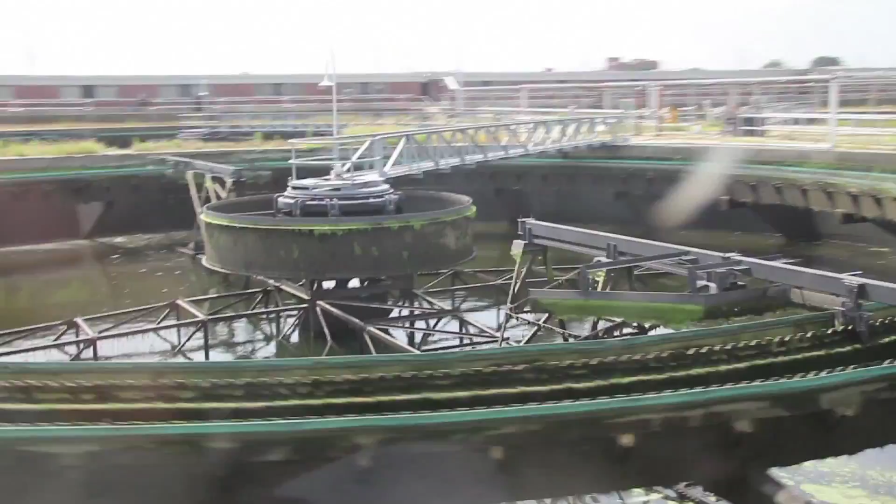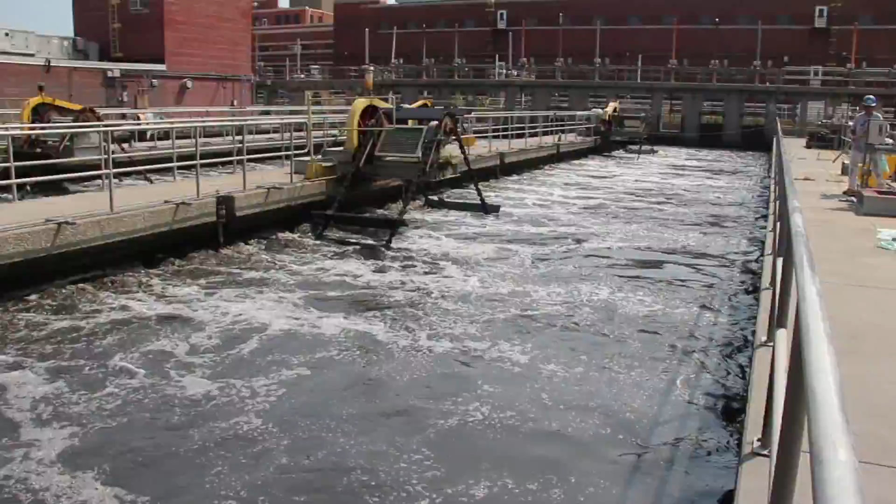This is my home. I promise to keep it healthy and beautiful. I will love the land, the air, the water, and all living creatures. I will be a defender of my planet, united with friends. I will save the earth.

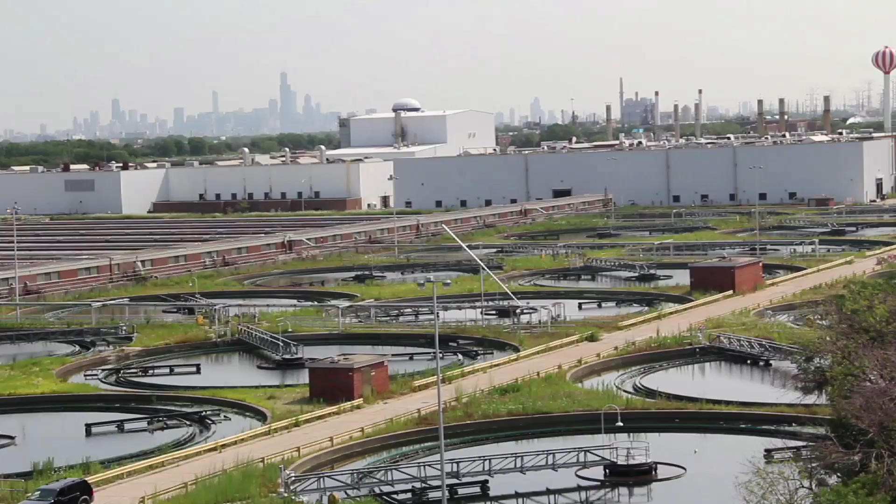The Metropolitan Water Reclamation District of Greater Chicago is one of the largest and most efficient wastewater treatment agencies in the world. They treat and dispose of wastewater for more than 5.4 million residents of the city of Chicago and 124 adjacent communities, as well as an industrial and commercial load equivalent of another 4.5 million people.

The Stickney Water Reclamation Plant is the largest wastewater treatment facility in the world. The plant serves 2.38 million people in a 260 square mile area, including the central part of Chicago and 43 suburban communities.

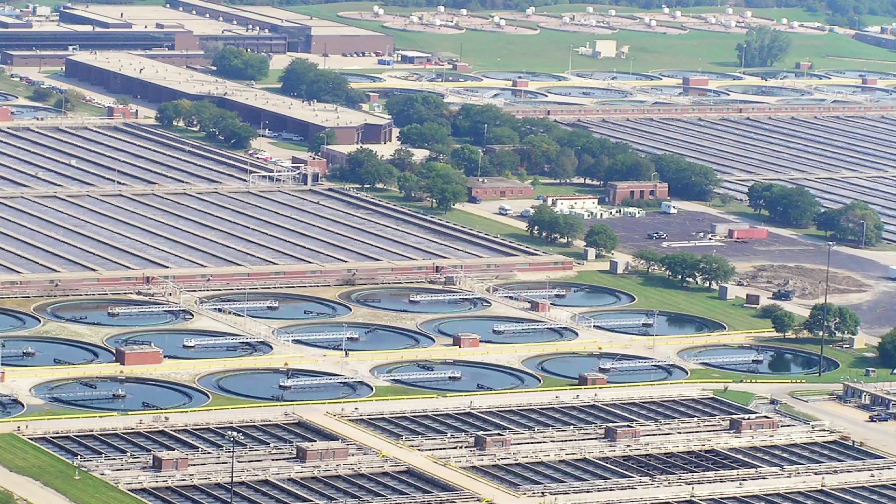The Stickney treatment plant mimics the purification process that occurs naturally in rivers and streams, condensing what would take 1 or 2 weeks to just under 8 hours.

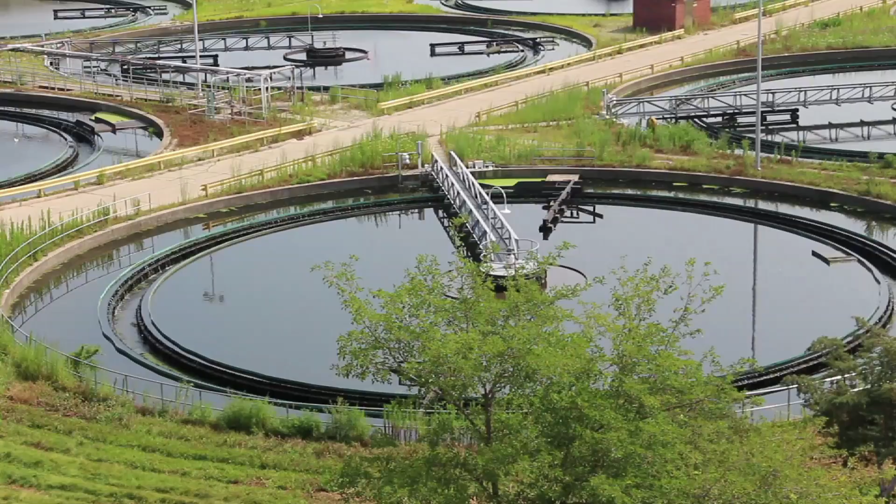The Stickney plant has a design capacity of 1,200 million gallons per day. Stickney actually consists of 2 plants: the west side portion of the plant, which was placed into service in 1930, and the southwest portion of the plant, which was placed into service in 1939.

The west side portion of Stickney was first constructed in 1930 and handles 40% of the primary treatment of the incoming wastewater.

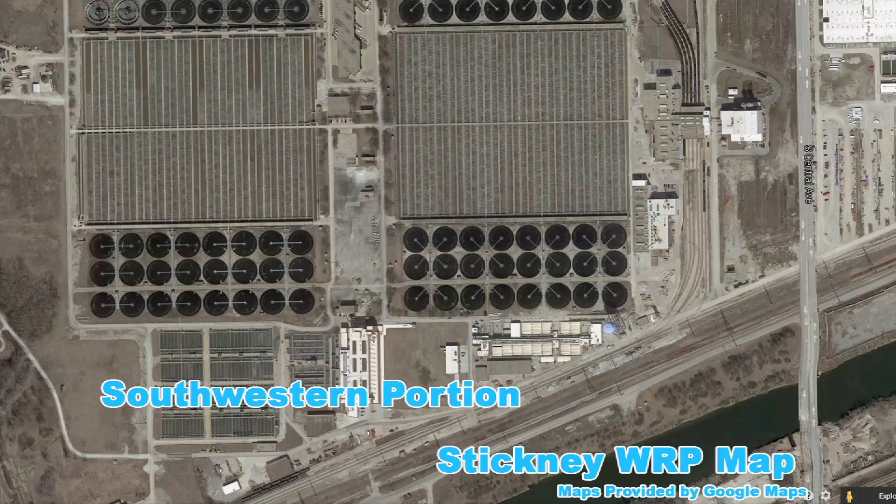The southwestern portion was constructed in 1939 and provides both primary and secondary treatment. It treats the remaining 60% of the incoming wastewater, and also serves as the secondary treatment for the wastewater from the west side portion.

The tour of the plant begins in the administration building, housing the main control room and laboratories that oversee the entire plant. Plant operators and technicians keep track of all the Stickney plant facilities and operations every day. There's always someone monitoring the plants at all times.

The latest computers keep track of all the facilities to make sure they are all working properly. If a machine is damaged or malfunctioning, engineers can be notified and sent to fix the problem.

Technicians also keep a constant watch of the weather so that they can make adjustments to control how much water is entering and exiting the plant.

My name is Commissioner Frank Avila. I'm a commissioner at the Metropolitan Water Reclamation District of Greater Chicago. We cover all of Cook County in Illinois, and we have 3 missions at the Metropolitan Water Reclamation District of Greater Chicago. Our first mission is to protect our water supply, which is Lake Michigan, because we need water to live and we want to make sure nothing is polluting our water supply. Our second mission is we try to manage flooding here in Cook County. And our third mission, where most of our dollars go, is that we treat wastewater.

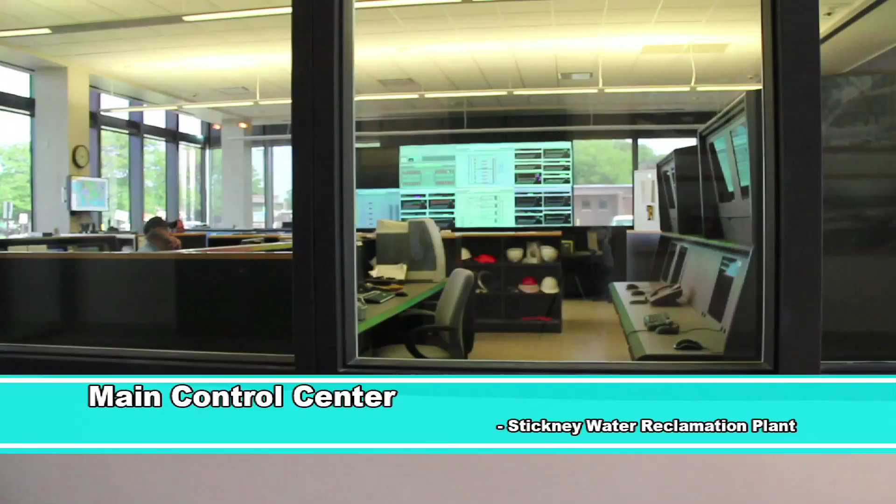First, I'm going to take you over so that you can see our main control center, where our treatment plant operators monitor what's going on in the plant. This room right here is called our main control center. The individuals working in there are called treatment plant operators, or TPOs, we just use the acronym. They monitor the levels of the sewage entering the plant. You can see computer monitors being projected onto a board. They're constantly monitoring the equipment running in the plant, if any gates or valves need to be opened or closed, or if we need to turn on any other pumps.

They also monitor the oxygen found within our aeration tanks, as well as the oxygen in our aerated grit tanks. If you look to the right, underneath the clock, you will see a board with the online weather station. They are monitoring the weather approaching the Chicagoland area. If we are to get storms or bad weather, they will be the first to know, and they will adjust the way the plant is running accordingly.

Casey, you mentioned the oxygen - as a human being, we need oxygen to breathe and live, right? Where the aquatic life in the waterways need dissolved oxygen. So they've got to make sure they maintain the proper oxygen in the waterways, because that determines the quality of the water in the Chicago area waterways. That's correct, Commissioner. Okay, and now we're going to go over.

Now we're going to look at this aerial photograph of the Stickney Water Reclamation Plant. The Stickney plant is actually comprised of two smaller plants. The first plant was completed in 1930 and is considered the West Side plant. This plant provides primary treatment to about 40% of the incoming wastewater. After the primary treatment, the wastewater is then sent over to our Southwest plant, which was completed in 1939. This plant provides both primary and secondary treatment. It treats about the remaining 60% of the wastewater entering the plant. It also provides the secondary treatment for the 40% of wastewater coming over from the West Side plant. The entire plant sits on about 570 acres of land.

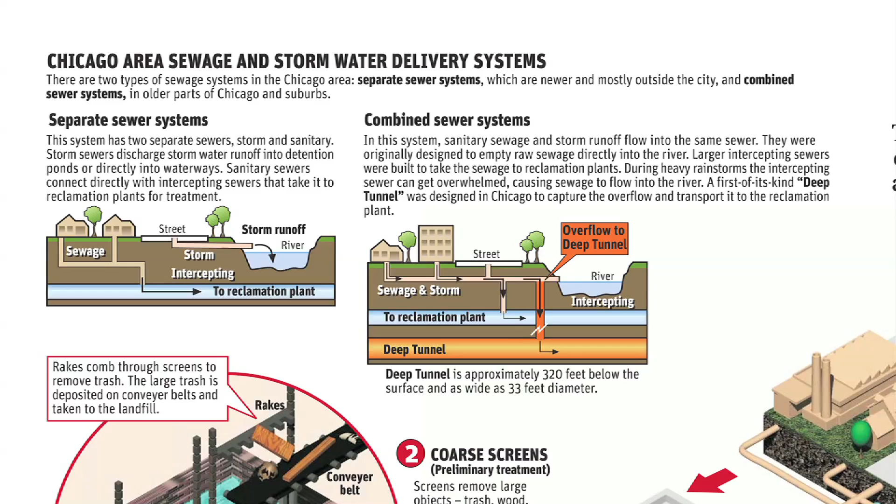Now we're going to go over to this diagram to explain exactly what we do here at the Stickney plant. So now we are here at our 'down the drain' diagram to give you a description of what we do here at the Stickney Water Reclamation Plant. In the Chicagoland area, there are two types of sewer systems. You have the separate sewer system, where sewage from the homes comes directly to the water reclamation plant, and the sewage from the street, the storm runoff, would go into our local waterways. However, here at this district, we want to capture as much sewage as possible to treat it before we put it back into our local waterways.

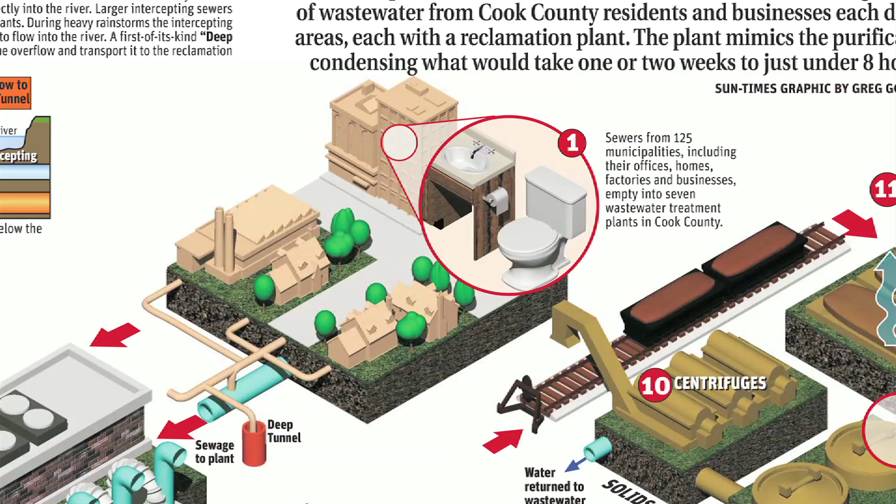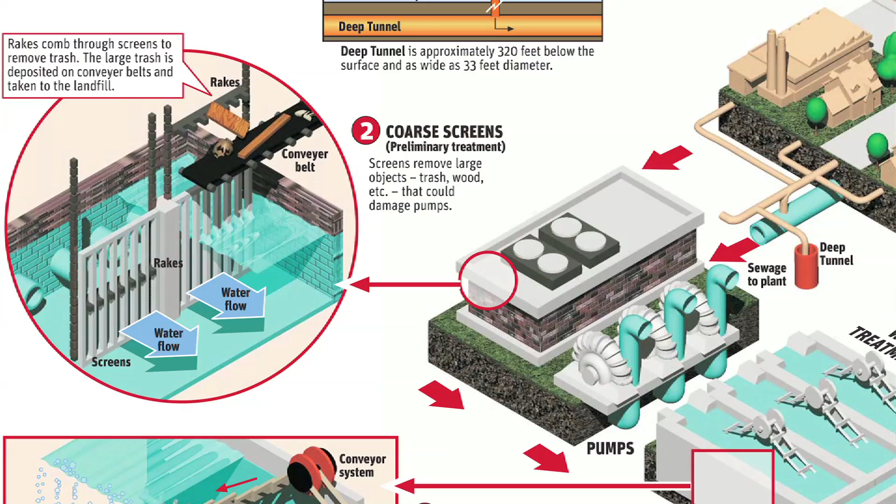So we have our combined sewer systems, which capture the sewage from the homes and businesses as well as the street, and we bring it here to the Stickney Water Reclamation Plant. We treat it and then we dump it back into our local waterway. However, if it rains a lot or if it floods, we have what we call the deep tunnel, which is the first of its kind design in Chicago, to capture the overflow and transport it to the reclamation plant. The deep tunnel that serves the Stickney Water Reclamation Plant is called the mainstream tunnel, or TARP. The first set of tanks that our sewage water will enter is called the aerated grit tanks.

In these tanks, you will find a chain conveyor system with wooden boards. The purpose of these tanks is that sewage water enters, and although we capture debris in the coarse screens, there's still some small debris that got through. So we're blowing air into these tanks to cause the sewage to churn and move around because we want to get the grit and solids to drop to the bottom.

As it drops to the bottom, the tank is sloped so that the grit and solids make their way into a little channel where we have our conveyor system with wooden boards turning very slowly to push the grit and solids into a drain. That drain exits out into a truck, which takes the grit and solids out to a landfill. Again, we do not treat the debris here at the Stickney plant.

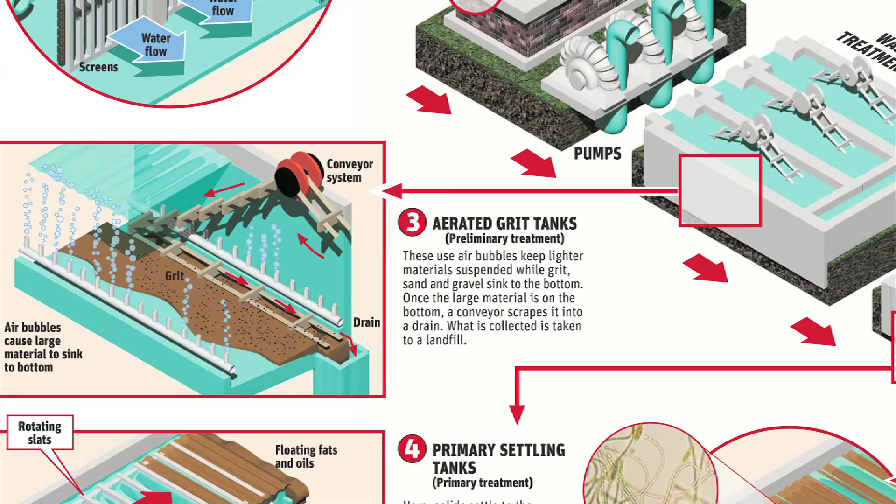After the sewage passes through the aerated grit tanks, it next goes into our primary settling tanks. Key word is settling. We want the sewage to settle. We want the lighter debris, the floating fats and oils, to lift to the top and sit on top of the water. And then we want the solids and grits that we still have in the sewage to drop to the bottom.

Again, we have wooden planks on a turning system pushing the floating fats and oils into a drain at one end of the tank. And at the bottom, the same thing is happening where solids and grits are pushed into a drain at the other end of the tank. At this time, the solids are being sent over to our solids treatment side to be turned into biosolids.

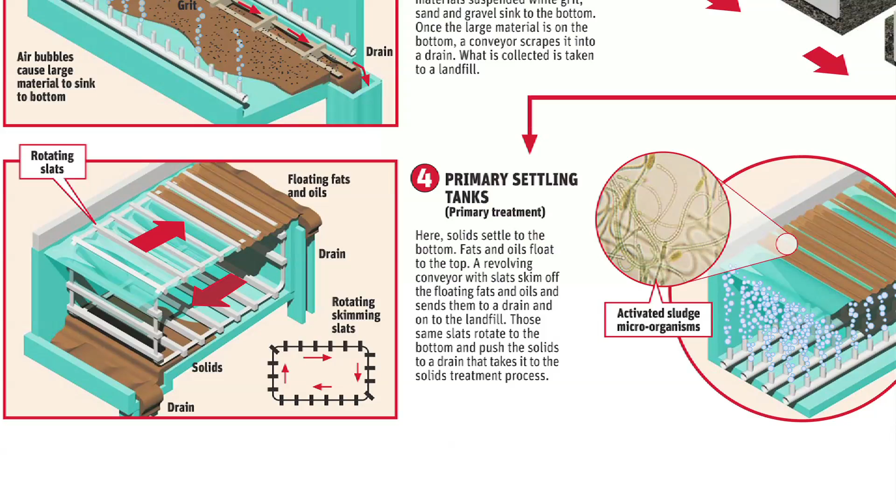After about 45 minutes, the sewage will pass on to our aeration tanks. In these tanks, we have our activated sludge microorganisms. These microorganisms are essentially good bacteria eating away at the bad bacteria. But as we stated earlier, we have to blow air or oxygen into these tanks because like you and I, we need air to live and breathe. So do these microorganisms, which are found in these tanks living, eating away at the bad bacteria.

The bad bacteria breaks down and the components drop to the bottom. At this time, those components are called waste-activated sludge, and that's being sent over to our solids treatment side to be turned into biosolids as well.

After 6.5 hours, the sewage passes into our final step in the treatment process, called the final settling tanks. These tanks are similar to the primary settling tanks in that we still want the sewage to separate. We want the solids, any grit left in the sewage, to drop to the bottom.

In these tanks, you will find a mechanical arm turning, and at the bottom of the arm there's a brush. This brush sweeps the bottom of the tank, and any solids found are pushed into a drain. The solids found there are now called return activated sludge, which is sent back to the aeration tanks to be treated again.

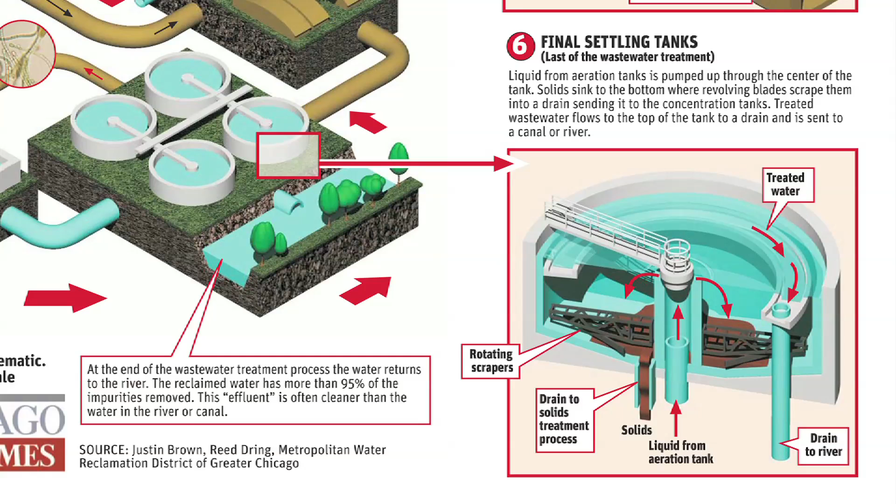After 2.5 hours, the sewage is then dumped into our final conduit tank. It is 95% treated, and it makes its way through a series of pipes and conduit to where it goes through the outfall into the sanitary and ship canal. The entire wastewater treatment process takes approximately 12 hours.

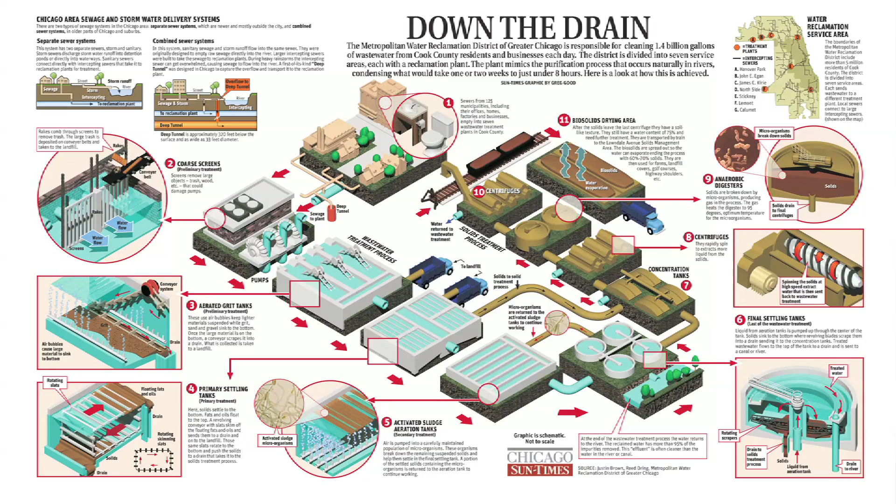That's excellent, Casey. And you know, what Casey was saying here about the activated sludge with your microorganisms is similar to how our body works — when we eat, we have a digestive system. The reason we stay healthy is because we have good microorganisms overtaking the bad microorganisms, and it works the same way here.

That's why the quality of how we treat our wastewater depends on our good bugs, the good microorganisms, and why we have to make sure they stay in the system. A portion of that will go out of the system, and she called it biosolids. So after treatment, because we're so intelligent and high class, the treated poop is now called biosolids.

Okay, so now we're going to discuss the solids treatment process, where we produce our biosolids. As I stated, we have sludge coming from our primary settling tanks, and waste-activated sludge coming from our aeration tanks, going over to our concentration tanks to be turned into biosolids.

The first set of tanks, as I stated, are called the concentration tanks. The sludge will sit in these tanks approximately 4.5 hours. Essentially what's happening is we want the sludge to settle to the bottom, we want the water to lift to the top. The water is drained off, and the sludge continues through the solids treatment process.

It goes into our first set of centrifuges. The centrifuges rapidly spin to extract more liquid from the solids. It's similar to a spin cycle on a washing machine, which spins real fast to remove as much water as possible from the clothes. After a 5 to 7 minute spin cycle, the sludge then goes into our digesters.

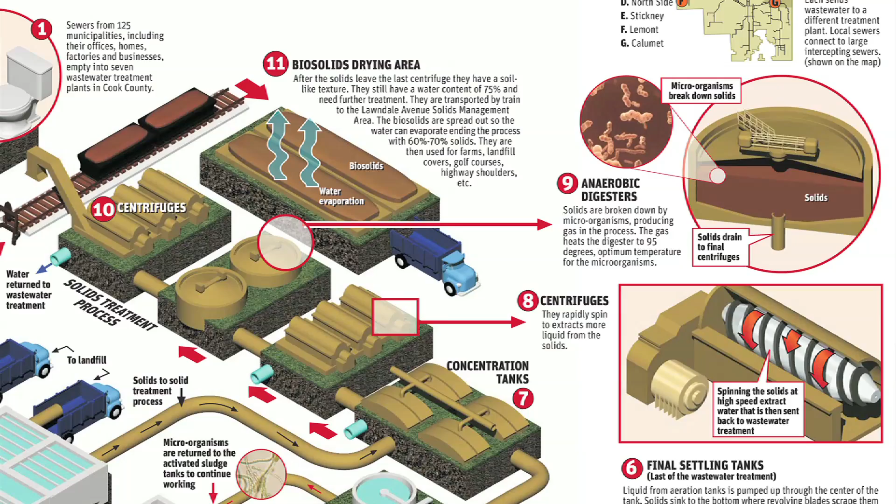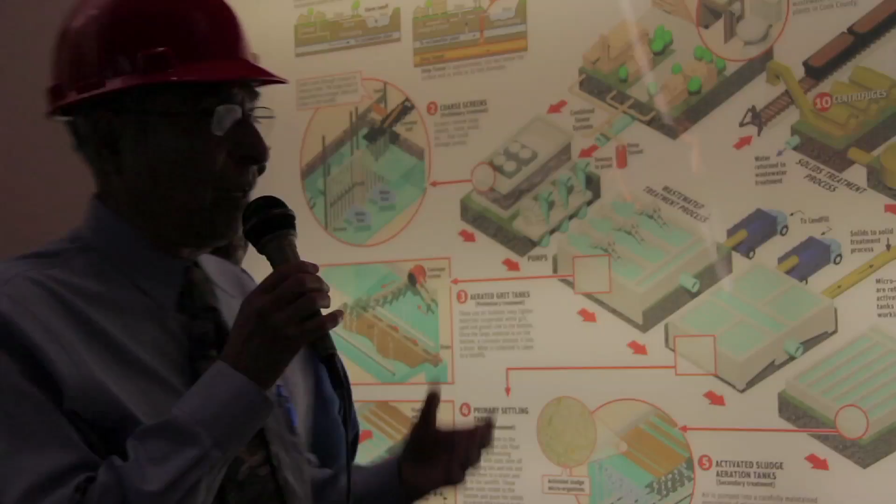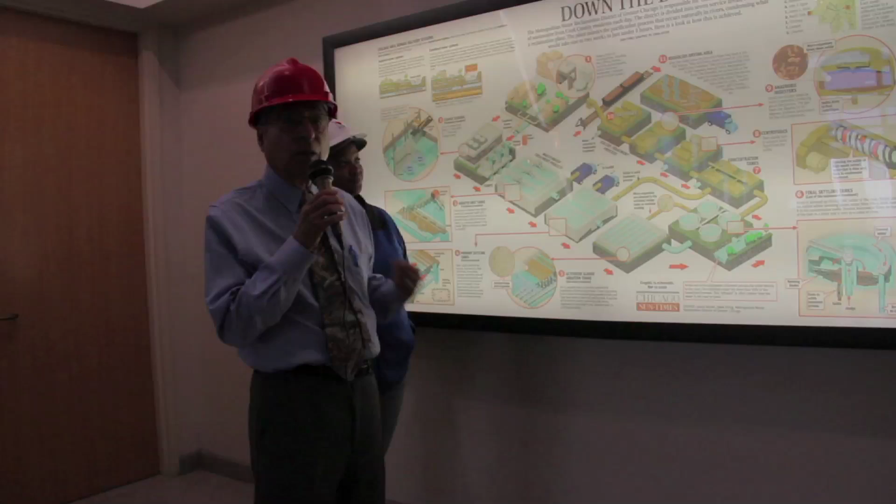Excellent, Casey. And now, at the district, what we're doing now - we used to call it wastewater, but it's not wastewater anymore. We're going to use the people's waste, the 2 peas in the pot as I mentioned, and in the digester right up here we have a lot of gas, and that's methane gas. We're going to convert that gas to energy and save the taxpayers some dollars by recapturing that gas, converting it to energy, and using that energy to power all of our plants. We're going to try to do this in about 10 years, saving the taxpayers about $30 million by converting the methane gas you give us every day into energy.

Also, in your urine we're going to capture the phosphorus that they say has been a depleting item here in the world. We're going to capture that phosphorus and sell it on the market - that'll be the phosphorus removal plant here in Stickney, which is going to be considered the largest phosphorus recovery system in the world. Stickney, as I mentioned, is the largest wastewater plant in the world that treats your 2 peas in the pot, poop and pee. We're going to have the methane gas, convert that to energy, and Stickney is also going to be the largest phosphorus recovery plant in the world.

We are doing amazing things here at the Stickney plant, and Casey and Joe Cummings are the experts in treating your 2 peas in the pot. At the Water Reclamation District of Greater Chicago, we are the experts in treating the 2 peas in the pot.

Okay, so now we're going to actually go into the plant and see some of these structures and tanks that we just discussed in this diagram. The first stop will be the pump and blower building, where we will see the 6 huge main sewage pumps as well as the blowers that lift the sewage water after it enters the plant 40 feet beneath ground level.

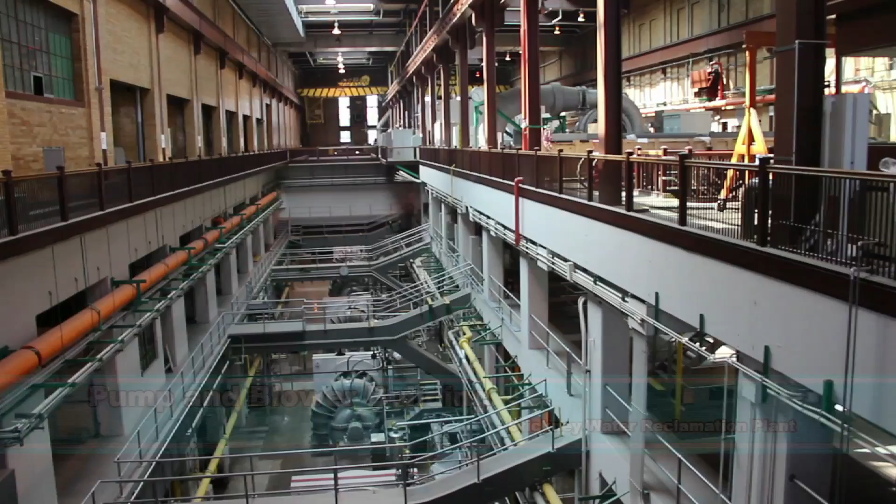The pump and blower building contains the main sewage pumps that lift sewage from the incoming sewers to an elevation that allows gravity flow to the rest of the plant. This is also the building that contains the blowers that supply the compressed air to the aeration tanks.

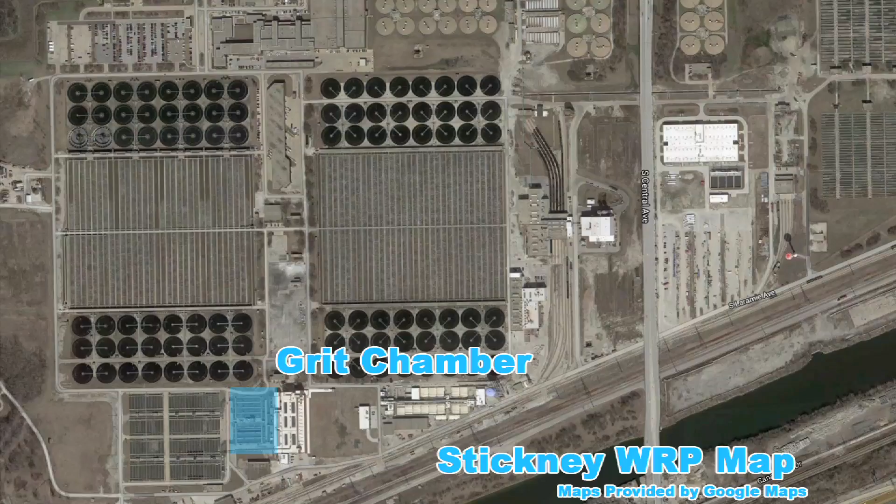This is our first, this is the grit chamber here. Why is this the grit chamber? Because this is removing all the grit, the sand, the gravel.

What, yep. Yeah, we'll hop out right here.

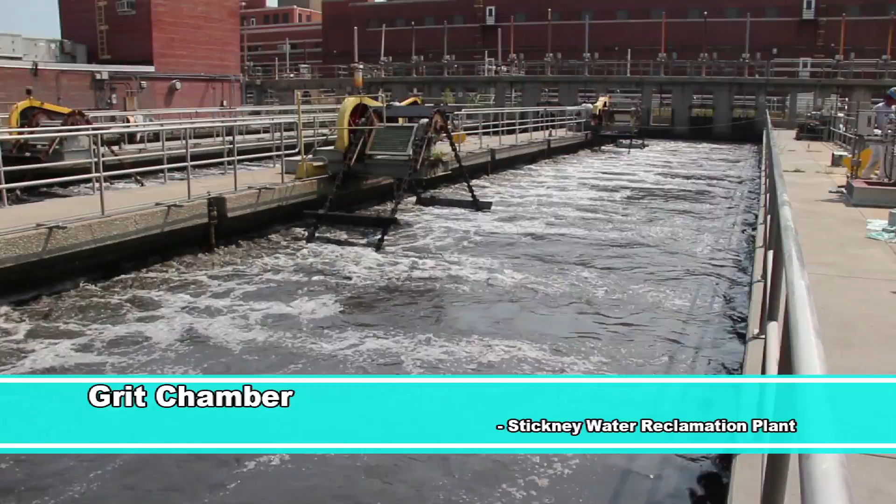The second stop on the tour is the grit chamber. The sewage flows through aerated channels at a slower velocity than it does in sewers. Because of the slower spiral flow, heavier inert materials such as cinders, sand, eggshells, and other smaller waste settle out. This material is pumped out and disposed of in private landfills.

Because of the frequent use of these machines, they have to be regularly maintained in order to function properly. At the Stickney plant, various porta-john companies dump wastewater into the grit chamber where it can be properly treated.

I'm with Joe Cummings, and we're at the second stage of the wastewater treatment process, and this is the grit chamber, right, Joe? Right, this is an aerated grit chamber. What's happening in the aerated grit chamber is the grit, the concrete chunks, rocks settle to the bottom, and then the chain and flight mechanism is going to come and push it to the bottom to collect it to go off to a landfill.

What we wanted to point out while we're here, this truck behind us is a waste hauler truck. Just like you have porta-johns out at your sporting events in the parking lots or in your parks, these trucks will collect all the sewage that's inside the porta-john. They collect it and they have a permit to come and discharge directly into our process for further treatment. So do you see the discharge now from the truck? Let's walk over here, and you could film the discharge now.

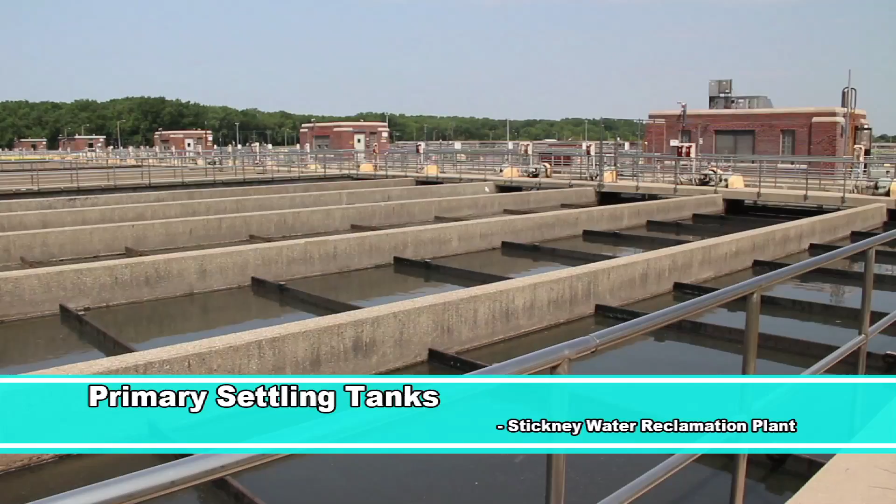This is where the heavier decomposable solids are settled out of the raw sewage. These tanks hold the sewage in a relatively quiescent condition for a period of time to allow settling. Approximately 20% of the oxygen requirements and suspended solids, which are impurities in the sewage, are removed here in the form of primary sludge. This sludge is then pumped into the concentration tanks.

These are our primary settling tanks. The sewage will sit in these tanks approximately 2.5 hours. We want the lighter stuff to float to the top, like floating fats, oils, scum. As you can see, it's sitting on top of the water. It's light. At the same time, we have this heavier debris dropping to the bottom.

You can see this board right here is about to turn under. What happens is these boards will move through the tanks to the left, pushing the bad stuff on top into the channel down here to our left. As you can see, that board is going down because it's pushing that floating fats and oils further into this channel over here. The same thing is happening on the bottom where the solids are being pushed into a drain at the opposite end of the tank.

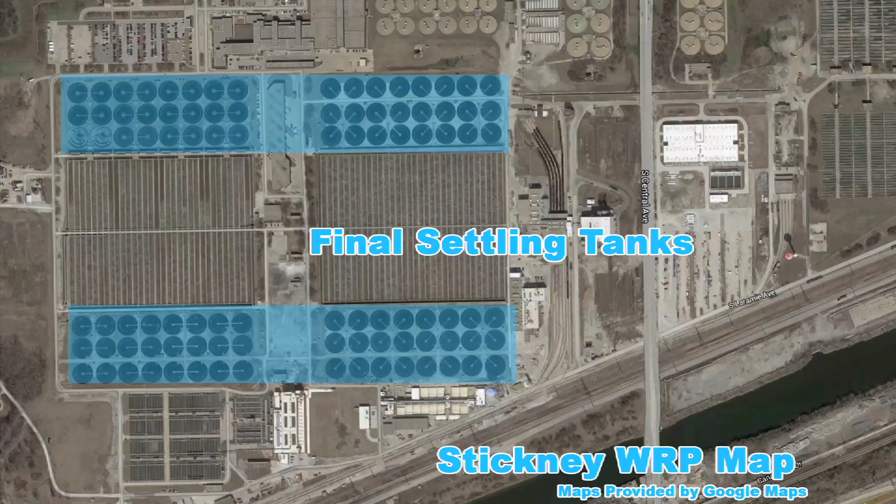These are the final settling tanks. This is where the mixed liquor from the aeration tanks is held in a quiescent condition to allow settling of the floc. The sludge which settles here is pumped back to be mixed with the incoming sewage at the beginning of the aeration tanks. Part of the sludge from the final tanks, which is excess cellular material, is split off the return sludge and wasted to the concentration tanks.

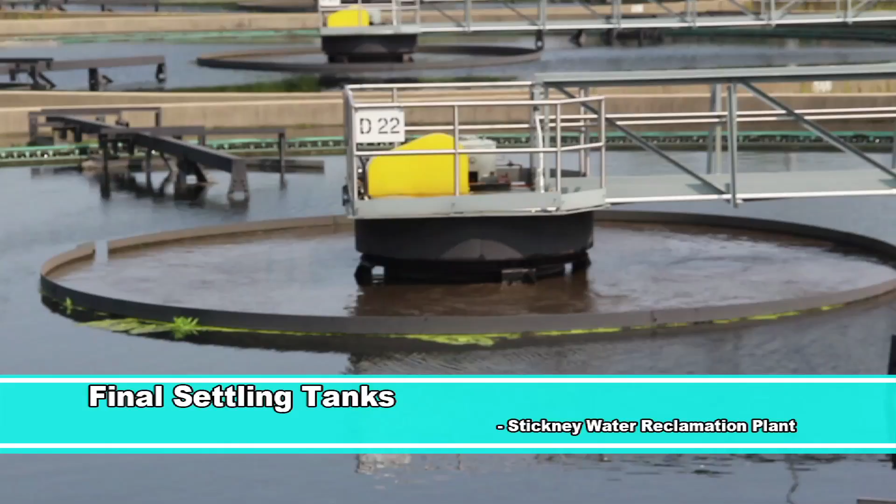The overflow of the final tanks is the reclaimed water. Small animals such as goldfish can be found in the final settling tanks. The final effluent is discharged into the Chicago Sanitary and Ship Canal, which flows into the Des Plaines River.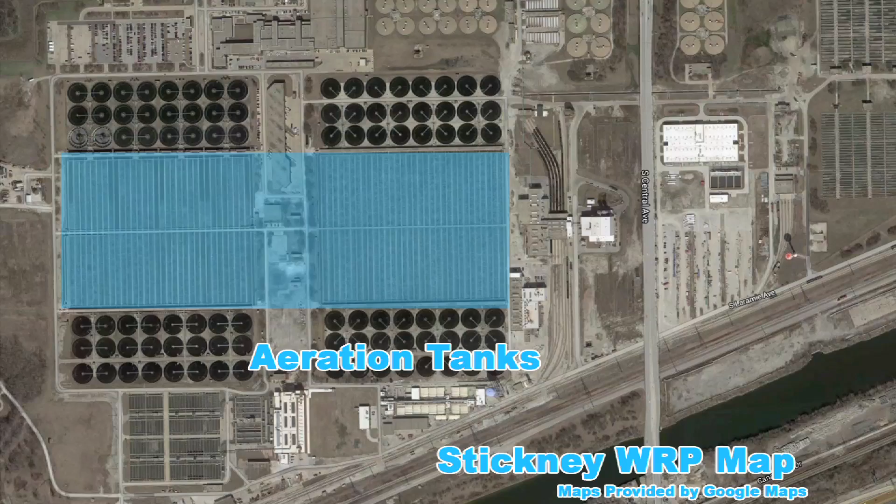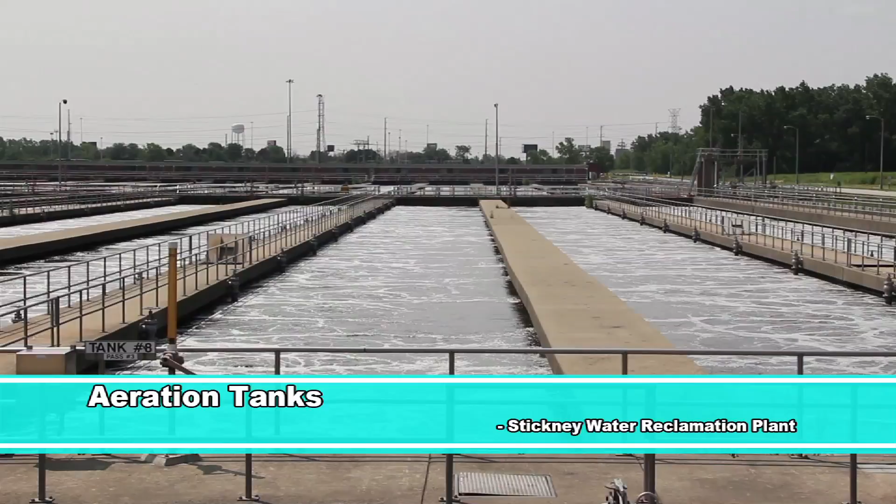These are the aeration tanks. In these long tanks, biological treatment takes place. A brown substance called return-activated sludge, which is composed of bacteria, uses the organic materials that remain in the sewage after preliminary refining for food. Thus, the bacteria cleans the water by using some of the organic materials for energy to live on and by converting the remaining materials to additional cells.

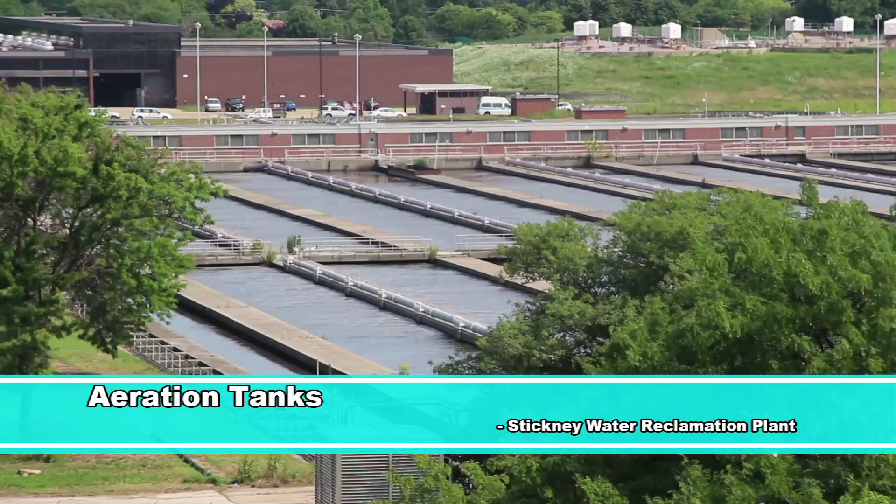When converted, the previously unsettleable and dissolved organic material can be settled in the form of a floc. The portion used for energy is broken down mostly into water, carbon dioxide, and nitrate. The air from the blowers is needed because the bacteria require oxygen for respiration. Bubbling the air mixture of sewage and sludge called mixed liquor provides this oxygen while agitating the mixture to keep the solids in suspension.

So the tanks you see to my left, those are aeration tanks. That's where we have our microorganisms living. You can see the bubbles, that's from the air being blown into the tanks. As we stated earlier, the microorganisms need air just like you and I to live. So the sewage water was sitting in those tanks about 6.5 hours with the microorganisms eating away at the bad bugs. After 6.5 hours, the sewage water would then pass over into our final settling tanks behind us.

It would sit in these tanks for 2 to 2.5 hours where it's going through a settling process. Again, we have the heavier solids dropping to the bottom, the sludge at this point, and then we have the cleaner water exiting out into this conduit in front of us, which is called the final conduit. After 2.5 hours, it dumps into this final conduit where eventually it makes its way to the back of the plant and exits the plant through our outfall into the sanitary and ship canal.

As you can see, we have fish in the final conduit. This water is now 95% treated. This is the final step in the water treatment process, which takes approximately 12 hours. The solids that drop to the bottom of the final settling tanks is now called reactivated sludge. We capture that sludge and we send it back through our aeration tanks. This is the reactivated sludge conduit over here.

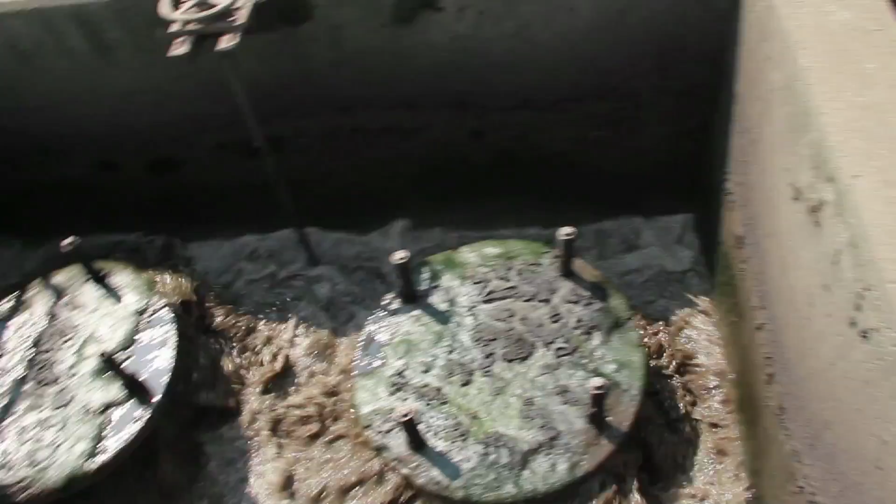That sludge is then entered back into our aeration tanks to capture the good microorganisms so that it can continue to process. And it's very important to reintroduce the good microorganism. Yes. Because we need the good microorganisms to continue cleaning the process of how we treat wastewater. Yes, that is correct. And, you know, it's just like, as I mentioned, in our body. When we eat food, we have to have the good microorganism to overtake the bad microorganism to stay healthy. Yes. Yeah, in our digestive system. Yes. Thank you very much, Casey.

Thank you. Joe, do you have anything to explain here besides what Casey mentioned? She mentioned about the aeration tank. She mentioned about the final settling tank, and she mentioned how you guys introduced microorganisms again to be used again. Right, I think you covered all the major points of it. The important thing is that the bacteria that we're using to metabolize all the wastes that are in the wastewater are naturally occurring, but they don't occur in the population, the quantity that you need to consume that much waste.

So what you see here are the airlifts. We're lifting the solids that are coming from the bottom of the final tanks, lifting them back up so that they can be reused back in the aeration tanks and go through it all over again. And as I mentioned, Stickney is the largest plant in the world. Our people here at the Metropolitan Water Reclamation District of Greater Chicago are the experts in treating the two P's in the pot, poop and pee. We have people from all over the world come and see how we protect the health and welfare of the residents of Cook County.

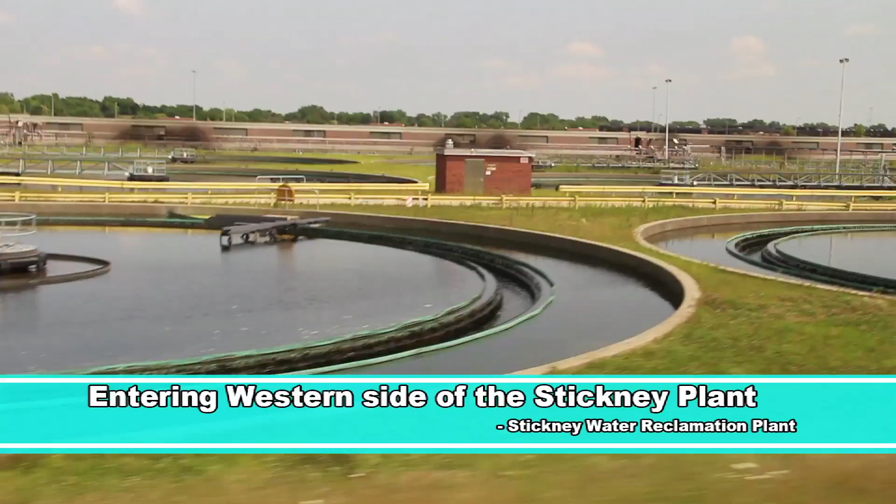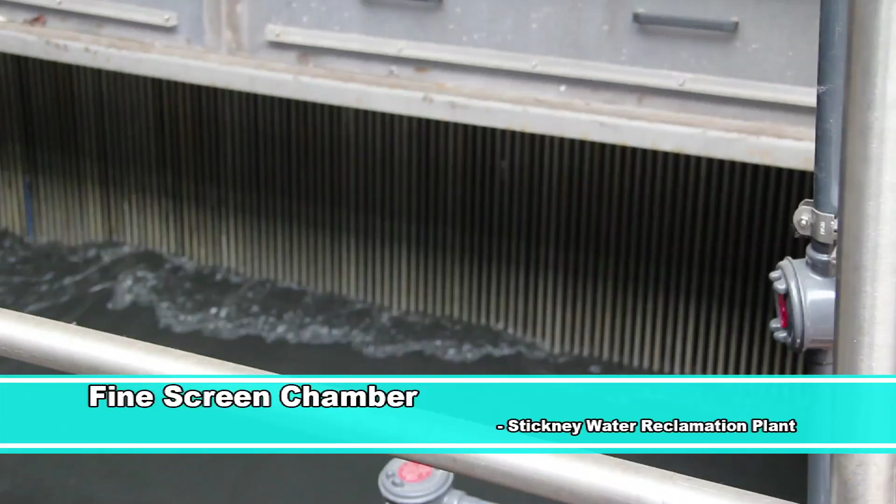This is the fine screen chamber. The fine screen removes large materials such as timber, plastic, and garbage from the incoming sewage. The garbage gets collected and sent off to be properly disposed of.

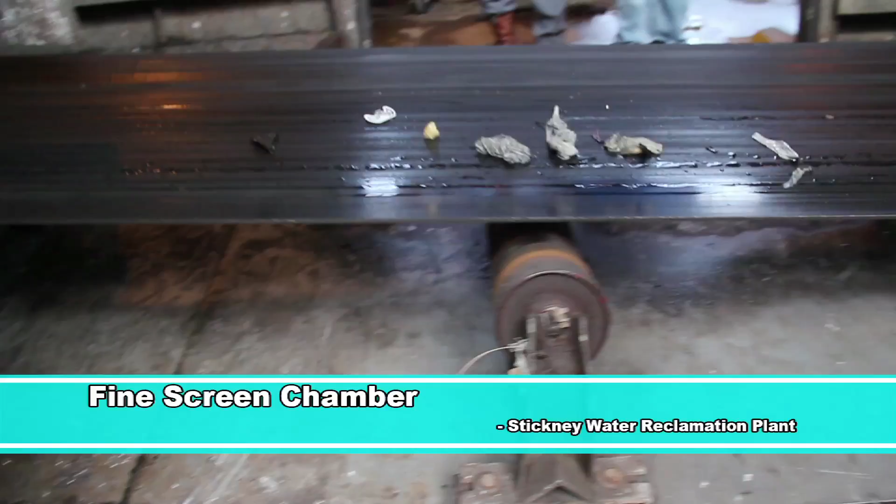We're here at the west side. This is a fine screen. What you can see is a series of bars spaced about 3/4 of an inch apart, 3/4 inch gap. The wastewater is flowing through the bars, and any of the material that's in there, you'll see in a second a piece of paper getting stuck on the screen.

That piece of paper is stuck, and then in a few minutes there is a rake that will go down to the bottom and scrape up all the material that is stuck on the fine screen, and it will lift it up, dump it on a series of conveyor belts, where it's then put in a dumpster and carried off to a landfill. At what point of the process

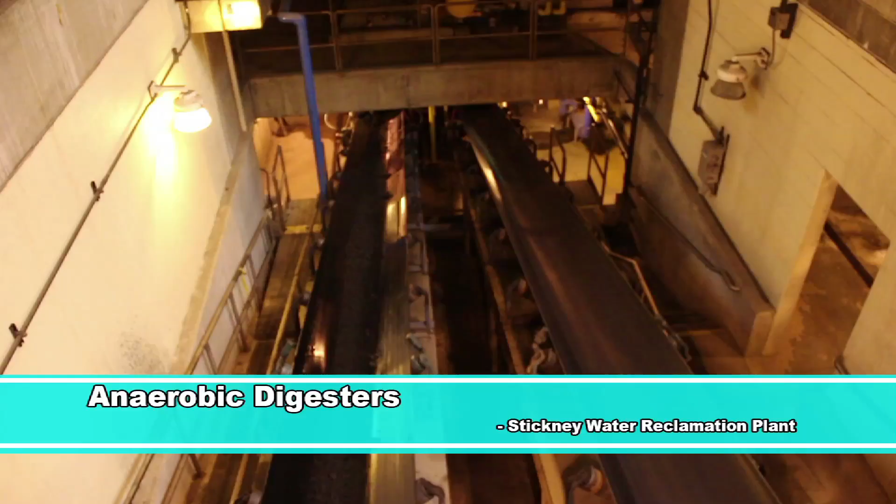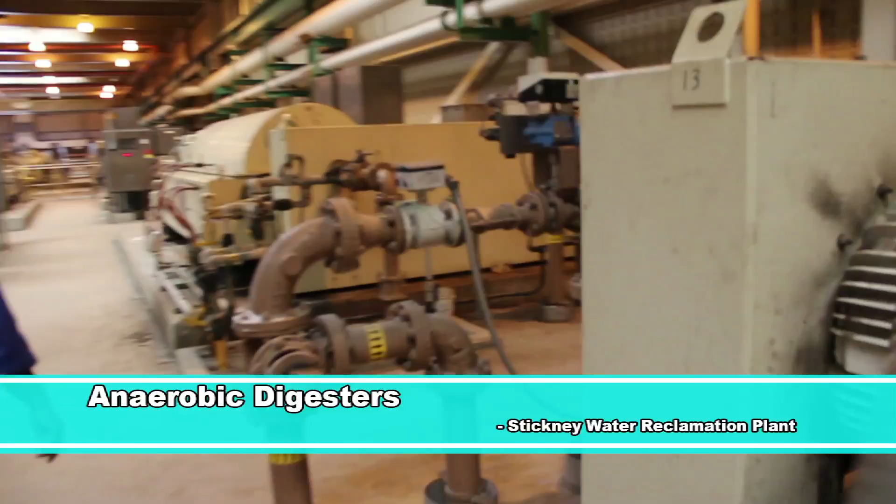Anaerobic digestion, a simple process, can greatly reduce the amount of organic matter which might otherwise be destined to be dumped in waterways, dumped in landfills, or burnt in incinerators which harm the environment. Solids are broken down by microorganisms, which produce gas in the process. The gas heats the digester to 95 degrees, which is the optimum temperature for the microorganisms.

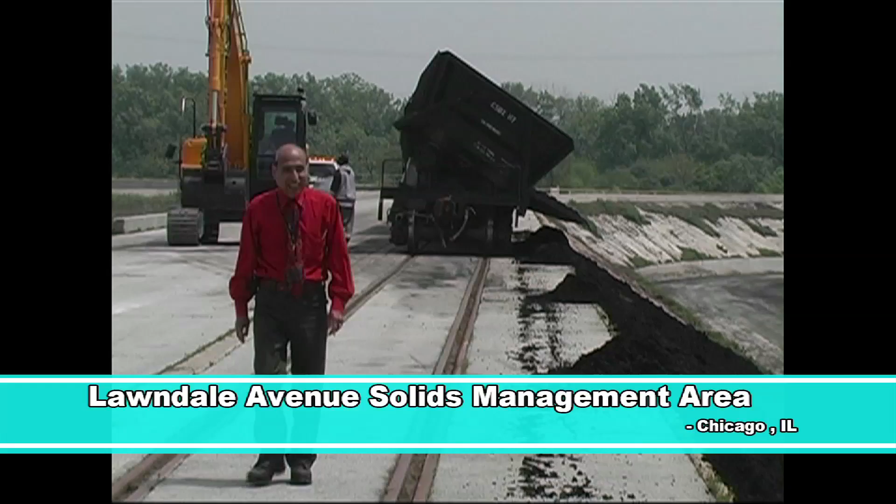After the solids leave the last centrifuge, they have a solid-like texture. They still have a water content of 75% and need further treatment. They are transported by train to the Lawndale Avenue Solids Management Area. The biosolids are spread out so the water can evaporate, ending the process with 60% to 70% solids. They are then used for farms, landfill covers, golf courses, highway shoulders, and playing fields.

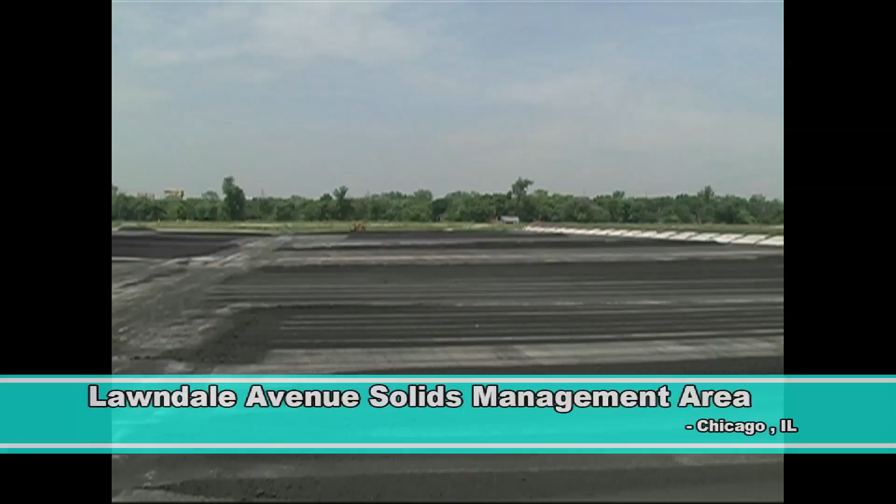So what we have here, we have some of our post-digestion centrifuges. The solids that were produced in other processes come here for dewatering. They go through a spinning action, as Casey described earlier. All the solids that come out drop down to the bottom onto a conveyor belt system.

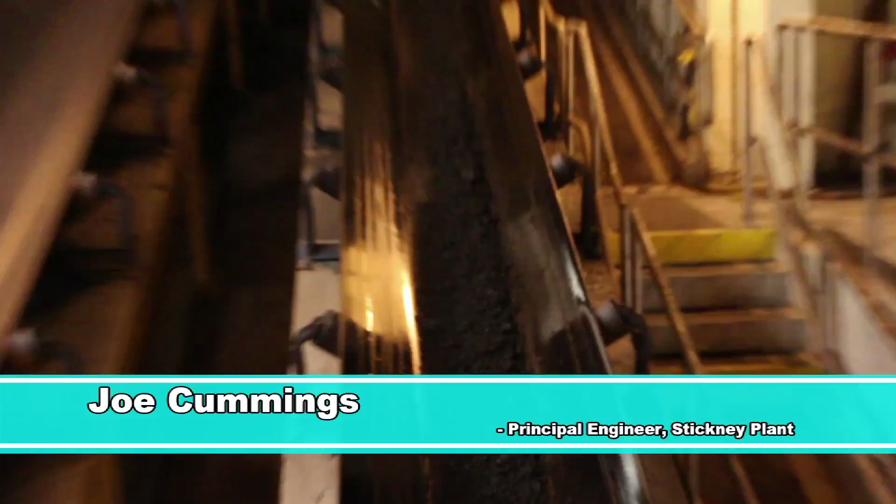Those solids, some of them go on to further processing and then will be treated as a beneficial product, as fertilizer that can go to golf courses, farms, and further sites, so that the solids are actually reused. They do not just go to a landfill.

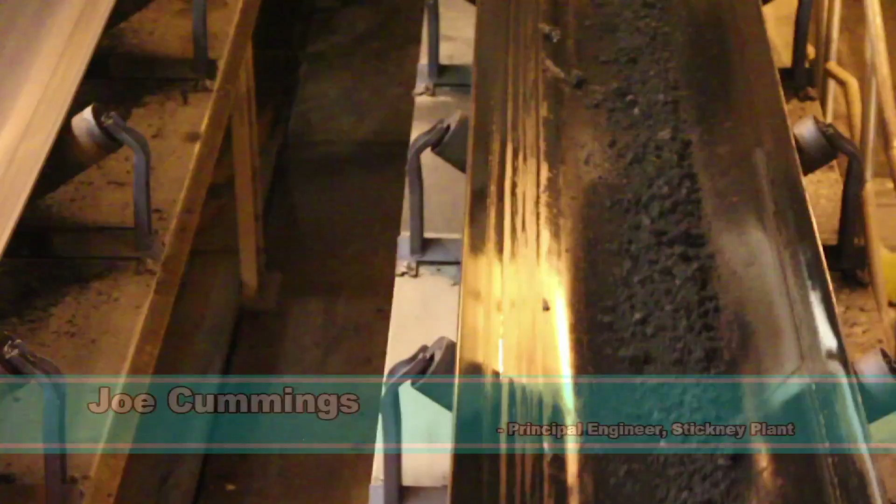Lunchtime, you ever lunch too? Oh, look at pizza. I got. We just talk about it. Pizza's not part of the deal.

Daniel, this is the control room for the biosolids being dumped into the train, and then you can look out there going down.

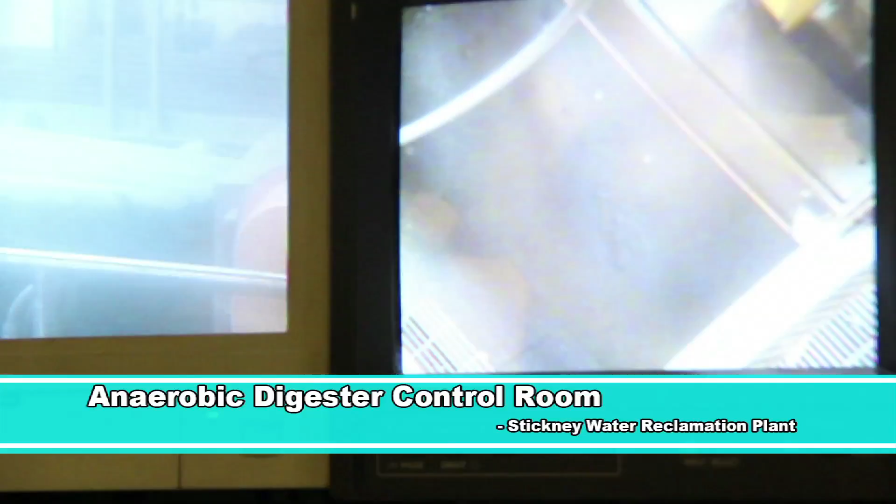This greenhouse is where Metropolitan Water Reclamation District scientists and botanists use biosolids to grow various plants. This is the green room at the Stickney plant, and this is where they do all their research on the use of biosolids on different plants. And they do some very important research here. And we have Dr. Pauline, which is one of the persons here that does a lot of the research.

And as you could see, we have different plants here doing the research, and they're using maybe 100% biosolids or treated poop or a mixture of the biosolid. Now, Pauline, what type of plants do you have here in the green room? Pauline? Several species? Different types. We've got ornamentals, we've got turf grasses, we've got herbs, we've got, there's a rhubarb over there, which is a perennial.

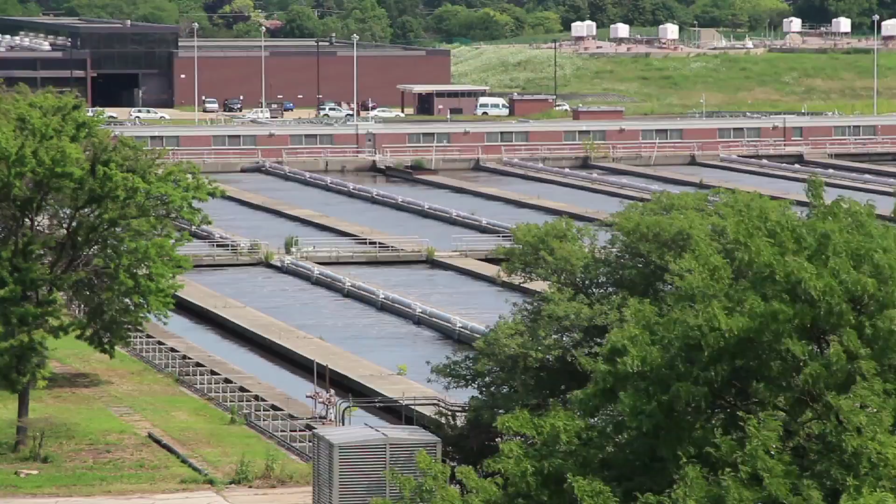To meet new phosphorus limits, the Metropolitan Water Reclamation District of Greater Chicago is assisting industrial users in reducing phosphorus from their waste streams, while at the same time implementing plans to recover this sustainable resource.

One way that MWRD protects the environment is by monitoring industrial discharges. As part of the strategy to reduce phosphorus levels, the MWRD asked commercial and industrial users throughout Cook County to evaluate their existing processes and identify potential opportunities to voluntarily reduce the phosphorus load in their discharge.

Presently, two of the largest industrial users to voluntarily modify their processes to minimize the release of excess phosphorus are located in the Calumet plant service area. AgriFine Corp., a manufacturer of animal feed, and Gelita USA Incorporated, a gelatin manufacturer, have begun to pursue modifications in their internal processes.

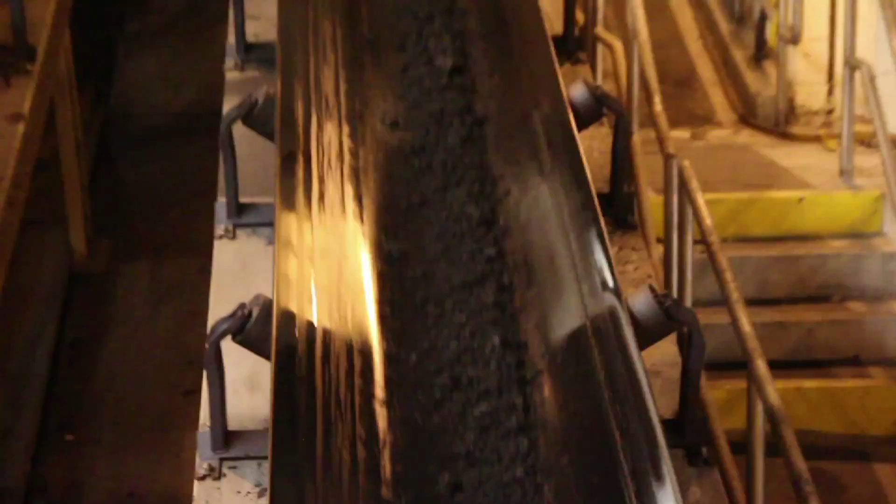The digesters at the Stickney plant produce biogas. Biogas consists of methane and carbon dioxide and is a product of the anaerobic digestion process that produces biosolids. The plant currently recovers biogas to heat plants.

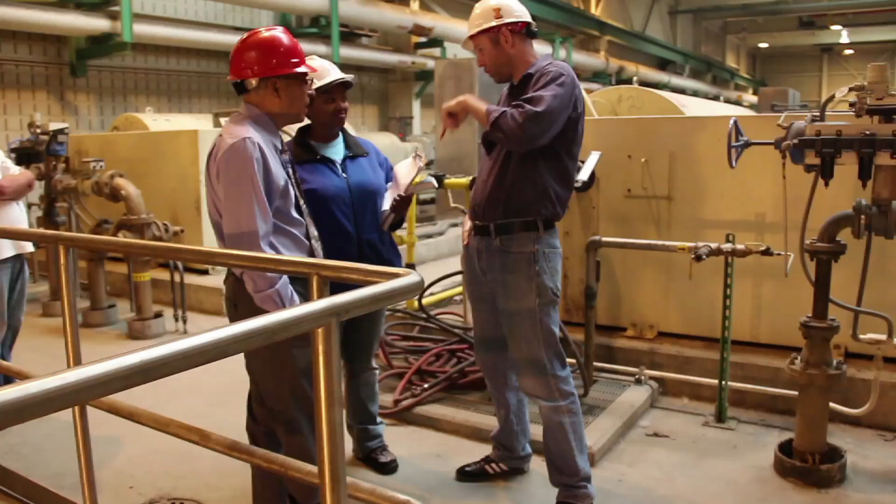Biogas can be cleaned to natural gas quality, compressed for vehicle fuel, or combusted to produce steam or electricity. In the future, carbon dioxide could be recovered for industrial uses or accelerating photosynthesis in greenhouses.

In 2014, the district will issue a request for proposal for methane utilization at the Stickney plant. Currently, the methane generated in the solids processing operation produces roughly 30% of Stickney's energy needs. This project will increase the efficiency of gas utilization such that Stickney will generate roughly 60% of the plant's energy needs.

Currently, the Stickney plant uses Imhoff tank technology for primary treatment of roughly half of the wastewater flow into the Stickney plant.

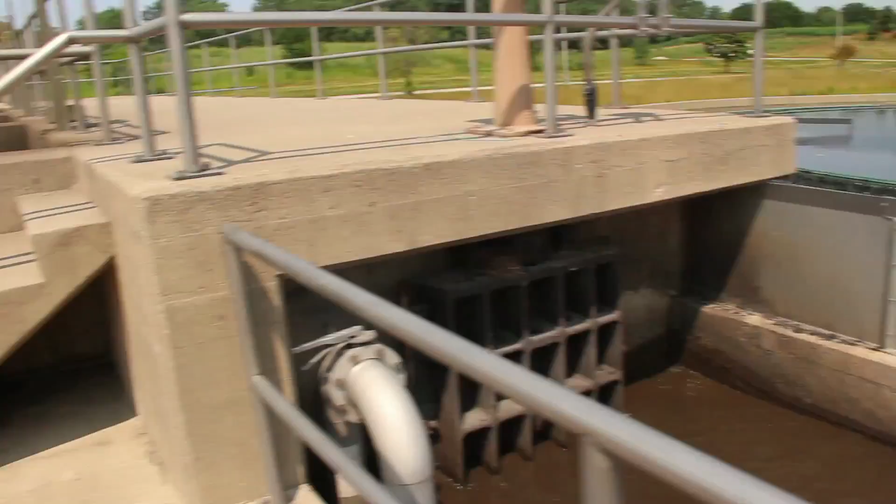In addition to treating our water, the top scientists, technicians, botanists, engineers, and workers come up with ways to make the Stickney plant cleaner and more efficient in treating our wastewater and producing biosolids that benefit our plants and wildlife.

The commissioners, engineers, workers, and people of the Metropolitan Water Reclamation District of Greater Chicago continue their goal to keep our water supply healthy and clean.